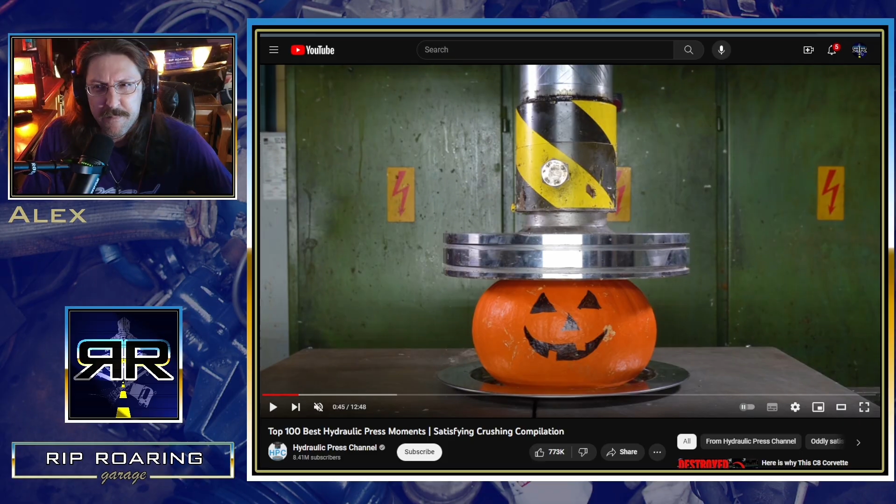Happy Halloween. This is foreshadowing for next episode. Crunch. What the?

Many of you may have heard of Giga Press or Giga Casting. In fact, that's probably why all the new guys are clicking on this video. So what I'm going to try to do is be as objective as possible, and only at the end will I impart my own opinions, right? However, getting information at this early of a stage is very difficult because, let's face it, most of the articles and videos are from Tesla fanboys. And we're going to have to dig through and cut through that and see how it's going to affect you.

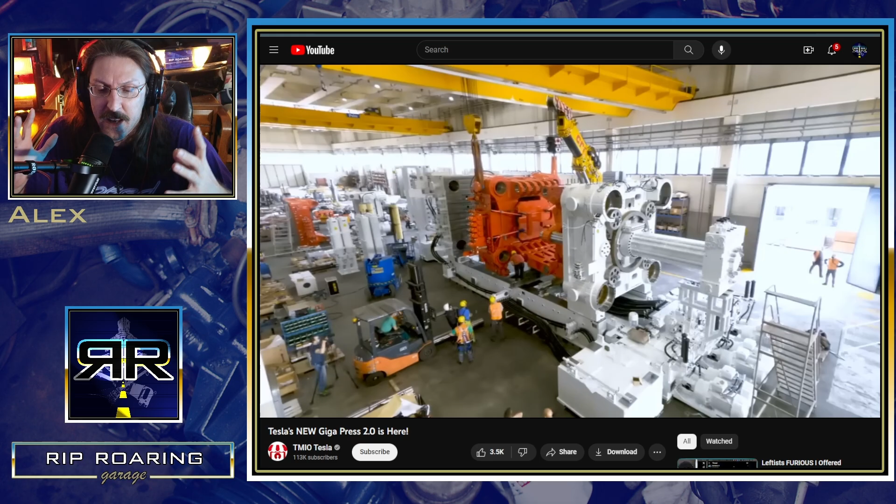Because as I said, this is a process that GM is investing in, Toyota, VW. So these are basically the three largest manufacturers in the world right now. What is Giga Casting? Well, like the name says, it's casting, metal casting at a larger scale. Not at the giga scale, let's be real. That's marketing lingo. And that is our first clue, our first indication that something's off.

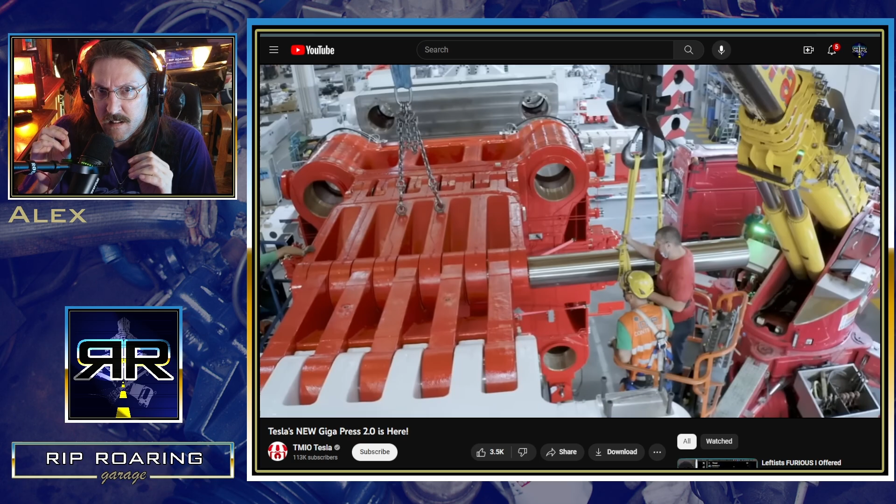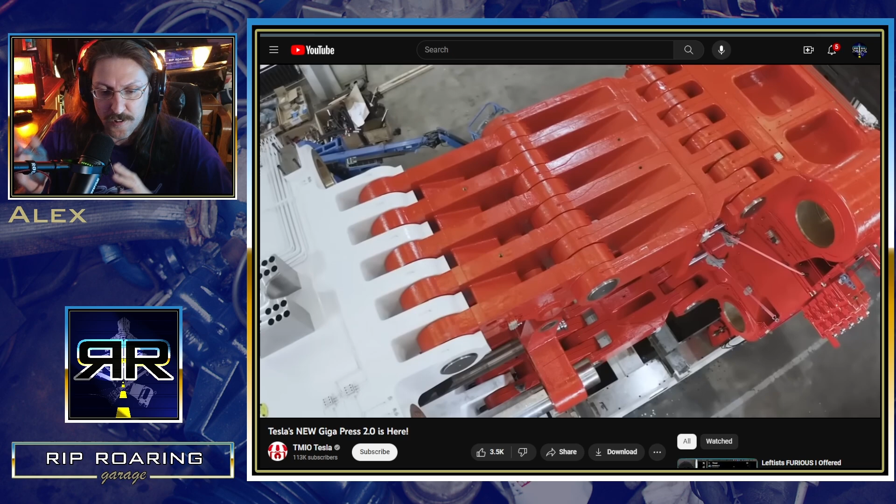There's a catch, because we have many different technological processes in fabrication, in metallurgy, and all that don't have a cool giga name. Why does this one have it? Because there's a catch. The marketeers are running out and putting this cool little label on it just to get that positive initial review, like a channel like this.

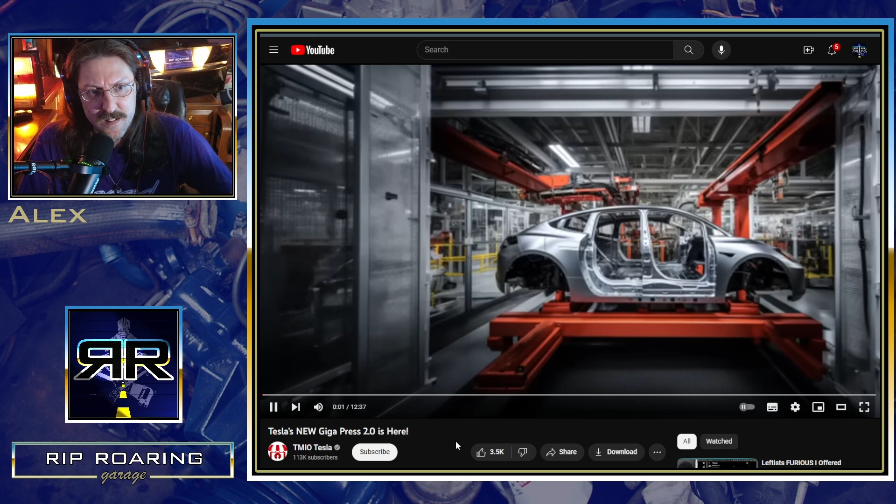Tesla is in the midst of developing a new $25,000 electric car, which aims to be half the cost of the previous generation vehicles, including the Model 3 and Model Y. Obviously, every manufacturer wants to lower costs and make their vehicles more affordable. Elon Musk revealed his plans to produce tens of millions of these cars.

Okay, tens of millions of cars. We're getting into the fluffery now.

Earlier this year, starting with a revolutionary new method that highly parallelizes the manufacturing process. Tesla calls this the Unboxed Process, which involves developing large sub-assemblies, giving them the advantage of allowing multiple workers and robots to focus on these relatively smaller parts at the same time.

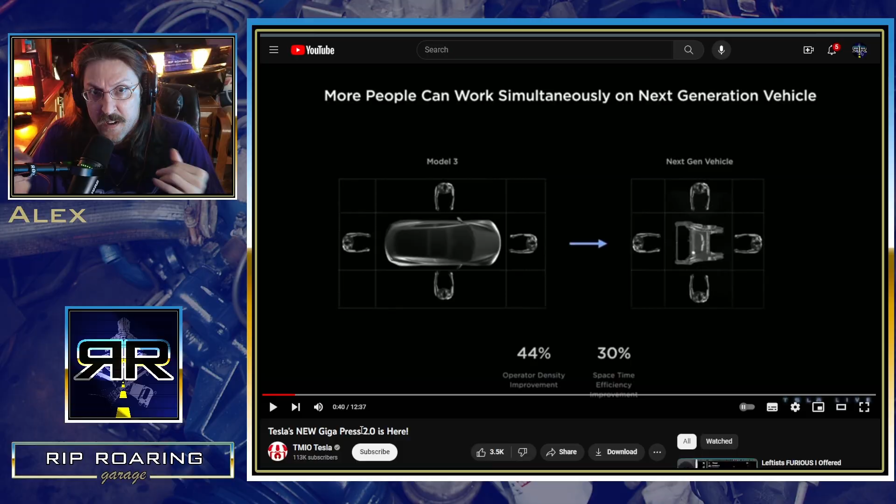So the problem with this is actually going a step back. When you're young, and most Tesla owners and fanboys are younger, they may not know this. The way vehicles were built was the vehicle was in place, people and teams would come around it and do their thing and assemble it little by little. They still do this on larger vehicles, trucks, tractor trailers, and buses. You still do that with ships, where they lay the keel.

This marks an innovative departure from the traditional assembly line.

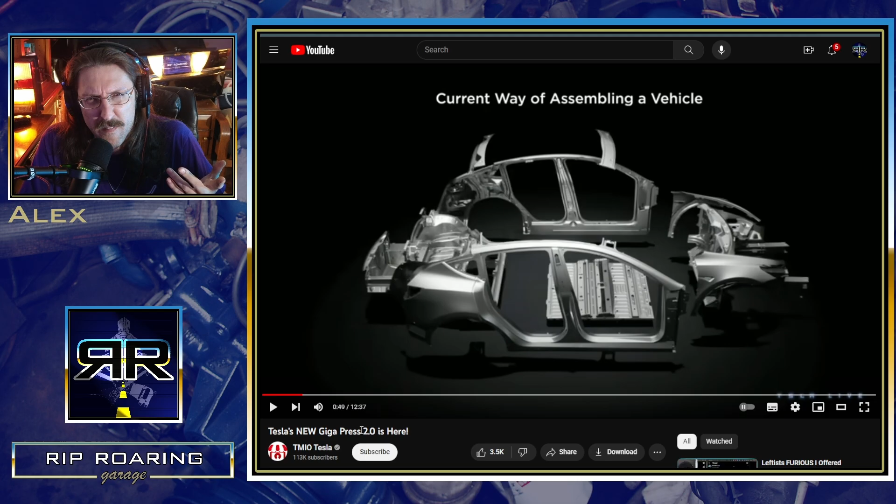How is that innovative? It's going back. It's literally showing me exactly how cars have been made for 70 freaking years.

Which, by definition, follows a linear path and hasn't seen significant changes in literally over 100 years.

Really? Or how about automation, robots? That drastically changed how cars were made. And this is the problem, like I said. You will get a channel like this that is enamored with the company. They're acting like a cheerleader, like unpaid advertisers.

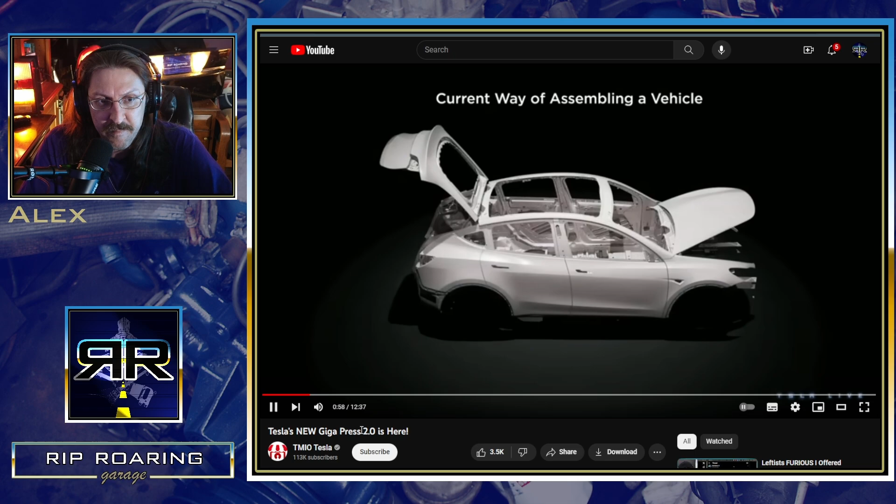Since it was popularized by Henry Ford. However, a recent report from Reuters reveals Tesla's under-the-radar pursuit of a groundbreaking next-gen technology, a Gigacasting 2.0, which is something slightly different from what they initially showcased to the public back in March of this year.

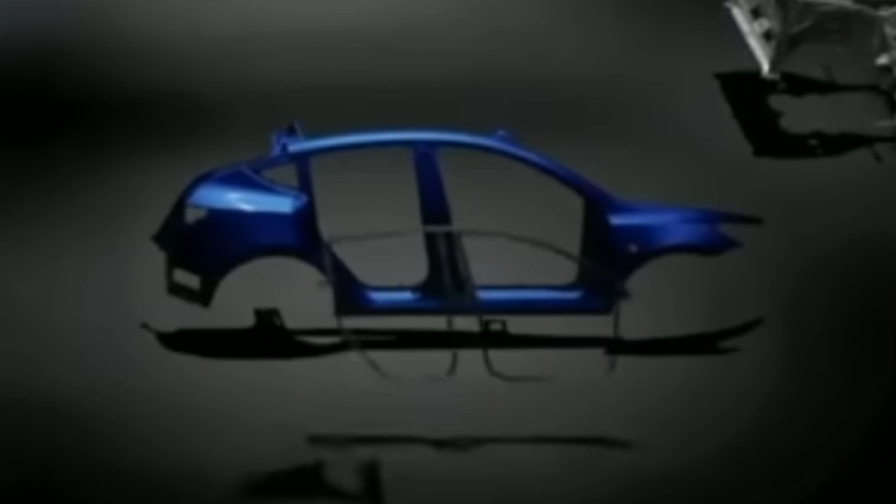I don't know what's so spectacular, because it's showing exactly the same components you get on a modern car today. Side panels and subframe. And you got the rear tub and the front trunk. No, I'm never going to say that stupid freaking word.

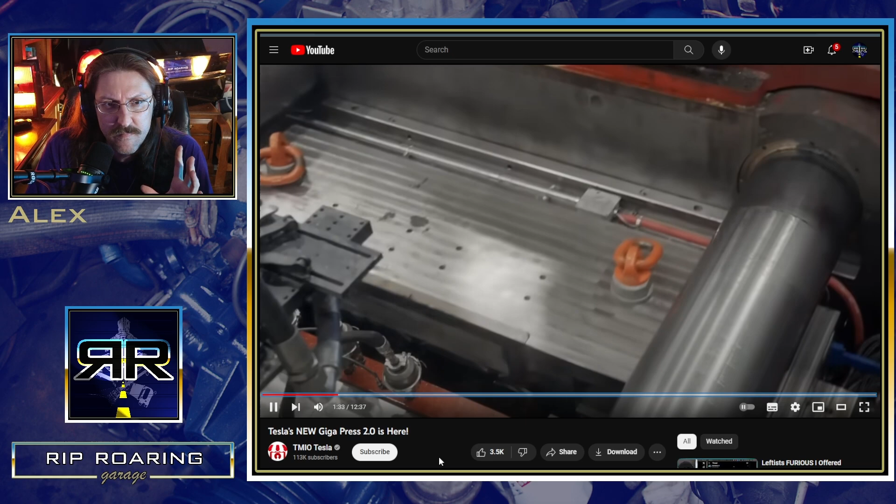Tesla has been making use of large gigacastings for the front and rear underbody of its Model 3 and Y vehicles for some time.

So in other words, that's the 1.0 version. Actually, I didn't know that's the way they made them. And that worries me. It should worry anybody that has a Tesla. We're also dealing with the metal that Teslas are made from.

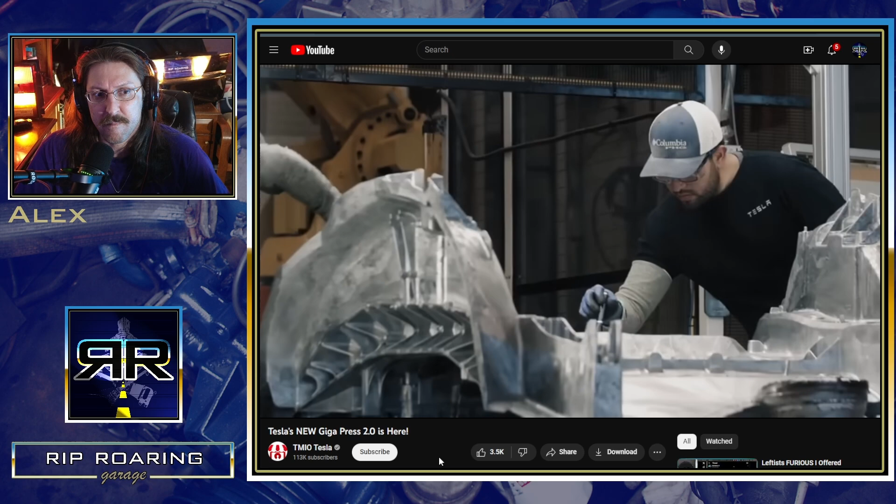They use custom-designed Giga Presses ranging from 6,000 to 9,000 tons of force that are built by the company Idra and contain some extra requirements from Tesla.

Guy doesn't say what those requirements are. However, Idra, this manufacturing company, it's a metallurgical company. They make these kinds of things for multiple manufacturers and not just in the automotive industry.

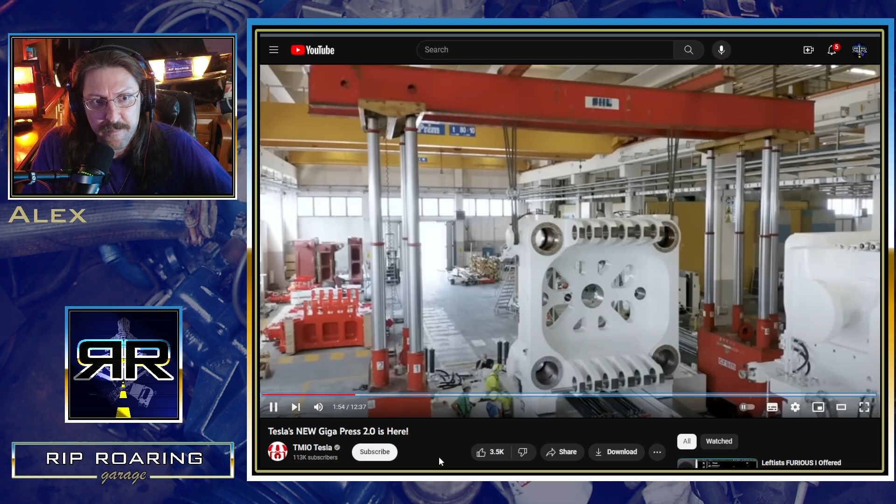Giga Press is one of the largest we know of that's been acquired by Tesla and is set to be aimed at casting parts for the Cybertruck. Because this is a completely different type of vehicle that employs an exoskeleton design. How is that completely different? That's just unibody. Unibody, you can say, is an exoskeleton car versus a framed vehicle that has, like a keel, like us, an internal structure.

Which places the structural elements on the exterior of the vehicle, as opposed to the internal chassis of a car. So he even says it as a fanboy channel. These are the guys that are out there getting out in front of any question somebody might have. Cheerleader, innovation tech, and buzzword after buzzword after buzzword. For this novel pickup truck. This, in turn, has provided Tesla with valuable insights that they could potentially reapply back into their existing chassis-based vehicles like the Model 3 and Model Y.

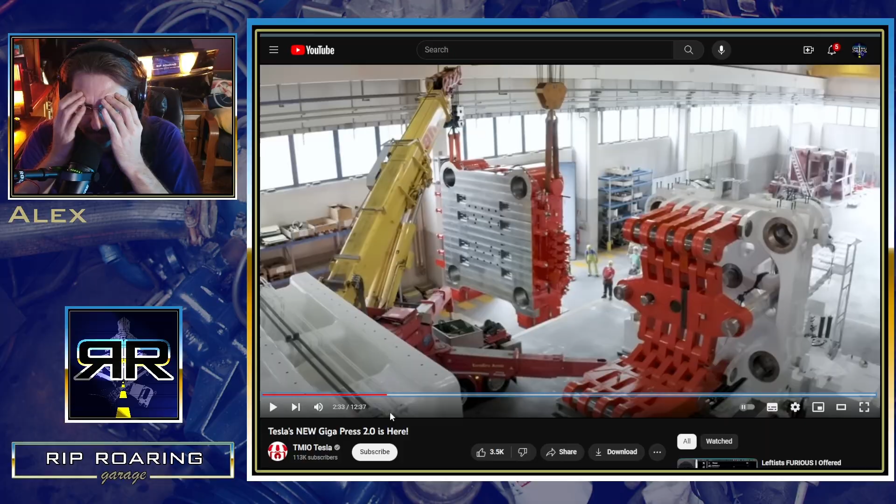What? Those are not chassis-based vehicles. Words have an importance. They communicate things. Teslas are unibody. They're not chassis-based vehicles. Tesla's approach is instead to leverage the learnings from the Cybertruck and create an entirely new, more efficient platform for the development of the upcoming $25,000 vehicle using the Unboxed process inspired by the innovations introduced with the Cybertruck.

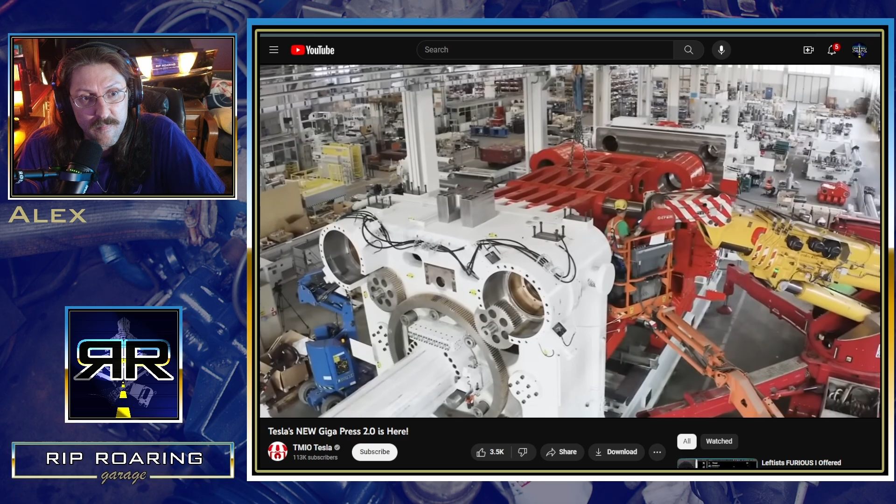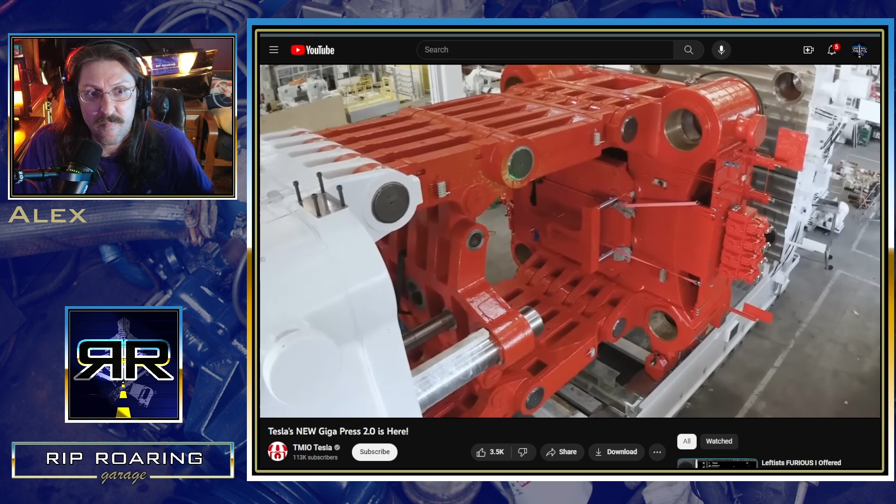Tesla's plan is to use this ultra-large casting machine to form the entire underbody of their smaller $25,000 vehicle in one single piece. This appears to be possible in part because the Cybertruck castings are so large. This is a whole bunch of fluff and nonsense. Tesla does have a patent for a giant multi-directional casting machine. Now this is actually interesting. Multi-directional casting, that is new.

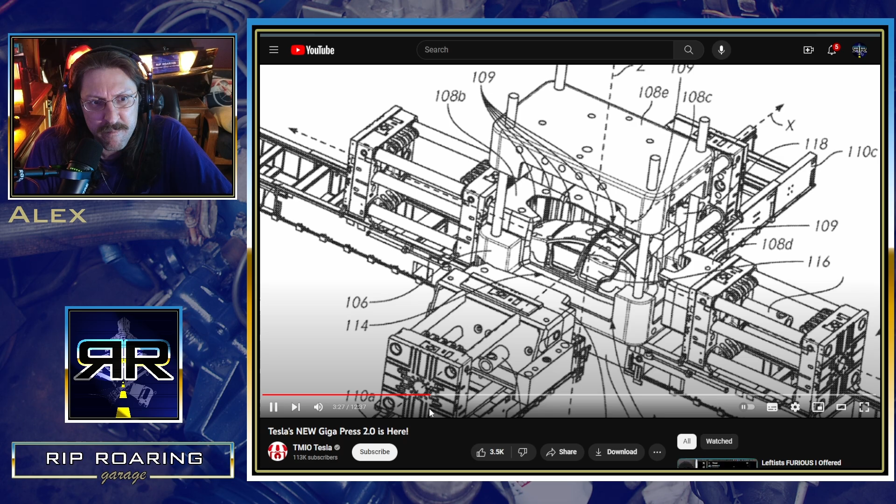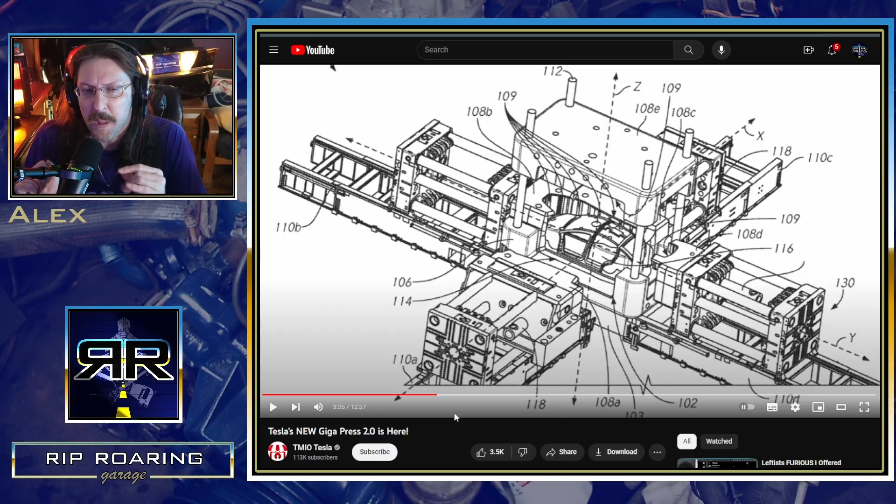Said to do the entire vehicle at once, demonstrating their desire to put more and more parts into a single casting. Why? What's this obsession with fewer parts? It has fewer moving parts. We want to make the body with as few parts as possible. Something that has many different parts makes it very easy to fix. It also makes aligning things easier. If you have one defect, then that defect will propagate to the entire assembly if it's one chunk. But I'm going to get into that in a little bit. I will be looking over some other articles that are more objective than this guy.

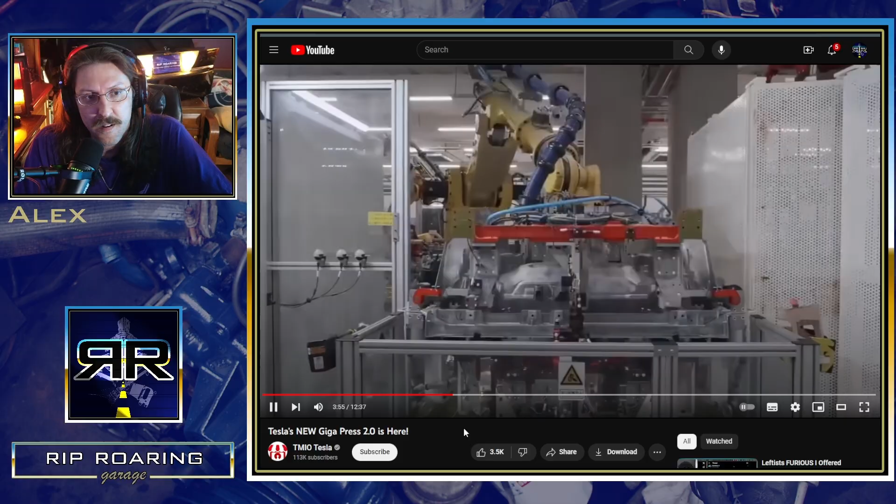According to Reuters, this would allow the next generation vehicle to combine up to 400 parts into a single casting. Again, this obsession with fewer and fewer parts. You need multiple parts. What are you going to do at one point? Just make a car with one part? That I don't know. These people are weird. I don't get them. It's interesting to consider that Reuters has been quite accurate with its predictions thus far. Right. Okay. Now this could be massive for Tesla and would push them to further disrupt the traditional automakers, especially since their current gigacastings have automakers who haven't at all innovated in decades scrambling to catch up.

This is, again, we're getting into religious territory, automakers that haven't innovated. That's why we have 1,000 horsepower cars you can just buy with the warranty. That's innovation, if you want to think about it in that sense. Tesla's tremendous cost savings and additional speed due to the... That's the key. That is the key right there, the cost savings. Giga Press's single part efficiency, eliminating swaths of factory robots, has made their electric vehicles highly competitive in the market. They're so competitive that you only see them in California and New York, right? While everyone else struggles just to break even. Just pulling it out of their butts.

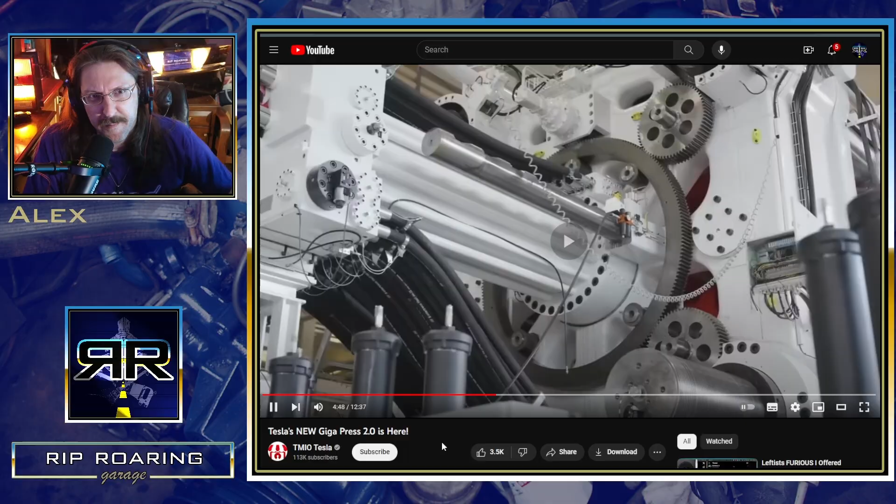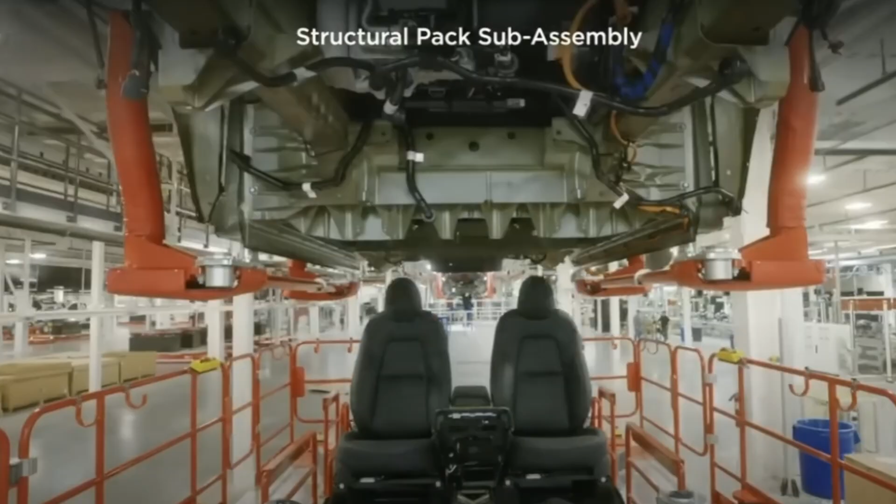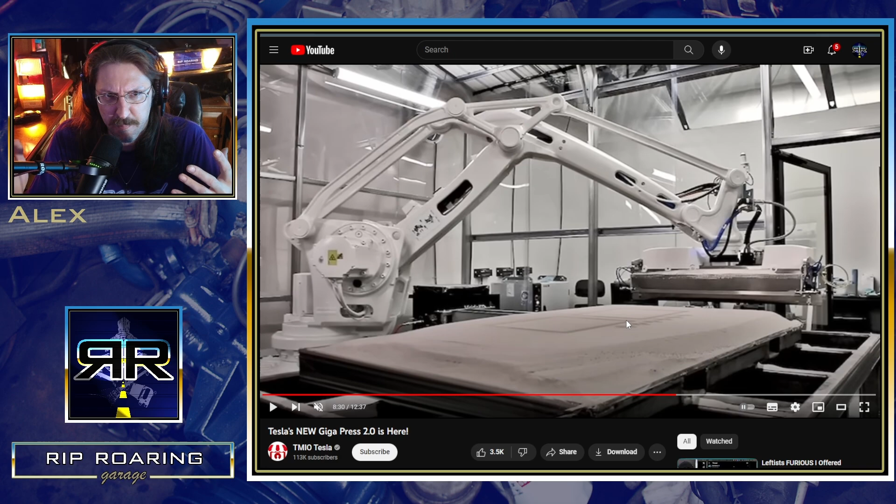However, this new Gigacasting 2.0 deviates or even conflicts with the innovative Unboxed process, which would completely change how the vehicle is built. That's an assembly line, buddy. Now, this is the interesting part. They have a cast manufacturing method that uses 3D printing with the medium being sand. You have something like this that basically will print out whatever the mold is supposed to be, and then you can use it in those presses. One of the cool things about the sand 3D printing mold is that you can create objects like this that are very intricate and complex.

Now, looking at a couple of other sources, Automotive News Europe: Giga Presses, the giant diecasts that are reshaping car manufacturing. As in the previous video we saw, the impetus is to reduce costs and increase efficiency, not the vehicle's efficiency. And that's the word game they play. They will say, oh, it's more efficient. No, it's not. It's the same car. You're just making it differently. It's more efficient for them. It costs them less. Granted, that may be a way to get a car cheaper. However, with inflation and all that, I don't see them hitting that 30K mark.

Tesla has pioneered the use of massive casting machines, also known as Giga Presses, to make large single pieces of the vehicle. Now, here we go. Critics say the process poses quality and flexibility risks, as a single flaw can compromise a whole module and make fixing more difficult.

But with the auto industry struggling to preserve profit margins and amid surging raw material prices, automakers including Toyota, General Motors, Hyundai, Volvo, and Chinese electric vehicle startup NIO are turning to companies such as Idra for help. We saw this innovation once before, probably many times, but one big time.

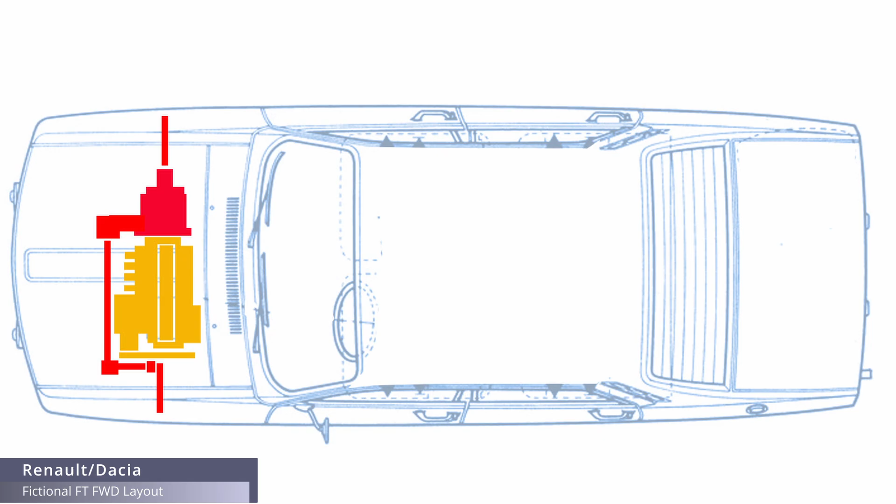And that was when we went from the conventional layout frame, engine in the front, drive wheels on the rear. The change occurred when they bundled everything into the drivetrain. The drivetrain assembly was the engine, transmission, and everything associated to get power to the wheels, all encompassed in the front, because it was easier to make that as one larger assembly and just drop it into this frame, the monocoque frame they called, right?

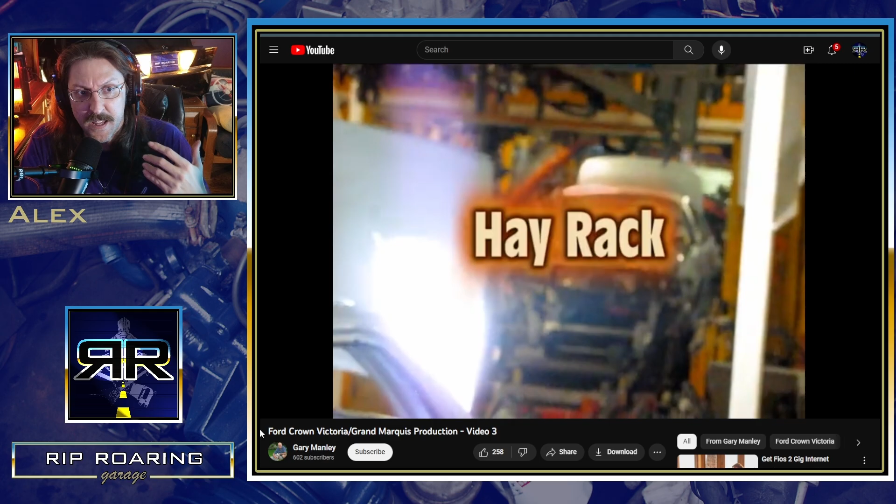The unibody. When you look at a car like the Crown Vic, you have the frame and the body coming in separately. So when they drop the body, the engine's already there, but it has to be done separately. On a unibody car, they will just add the entire drivetrain in one shot. Now, this doesn't occur with our Dodges because they're rear-wheel drive and they come up from underneath. And many cars will have their different processes.

However, the big question still remains. What happens with defects? Because on a car like this, everything is done compartmentalized. So a defect will not propagate to the whole car. And worse, that defect could translate to a car that ends up on the dealership lot and nobody knows until much later. Inside EVs, so these guys have that ideological interest to push this as the greatest thing. A Giga Press is a high-pressure die casting machine that injects molten aluminum into casting molds.

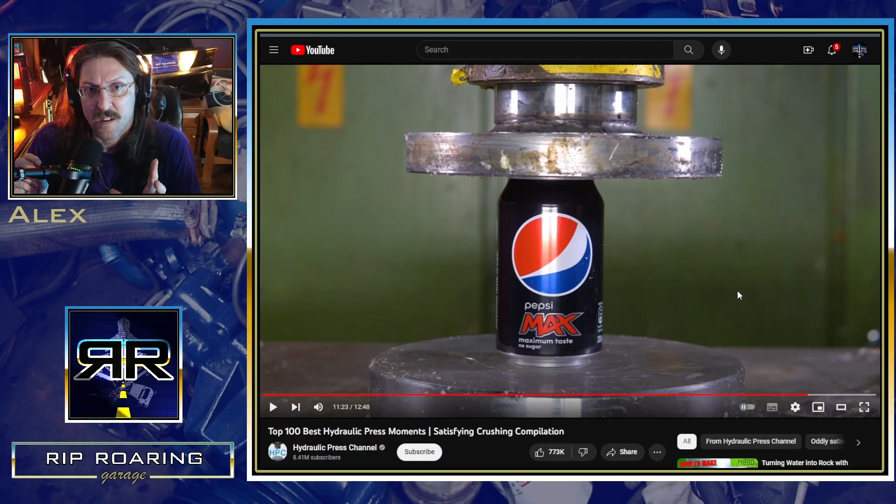And that's another problem we have. So on top of the defects that could occur, you have aluminum versus steel. Most cars are made out of steel, their body panels, their structural components and whatnot. Aluminum has a couple of interesting properties. One of them is that it work hardens, but also the reason they use it is because it has a lower melting point. You can inject aluminum into a cast without bringing the temperature up to the melting point of, let's say, steel.

I want you to look at the way the liquid inside an unopened can, how it creates these ribs. The metal will find its most energetically happy place. Incidentally, why barrels and other pressure chambers may have ribs on the outside. Well, they say 9,000 tons of force. What is that in pressure? 55 to 61 thousand kilonewtons, 5,600, 9,200 tons of force.

But force on its own is meaningless. I need a surface area. What does this force apply to? If you think about it from how it's made, an engineering standpoint, you don't need that much pressure when you're casting it. You only need as much pressure to eliminate any air bubbles and pockets in the cast.

Light Metal Age. The impact of gigacasting on car manufacturing and aluminum content. And they actually get into the alloys used, so the A380 and 319 alloys. They're talking about casting being historically used for the engine blocks and other larger assemblies that are made out of iron. Steel, but we colloquially call it cast iron.

Now, aluminum has been usually done in extrusion. You get it warm enough and you run it through something that shapes it, and it comes out as a sheet or a profile, like literally one of the ads. Yeah, like something like that. Remember all the little toys, die-cast metal. It wasn't plastic. It had some heft to it. It was a nice product.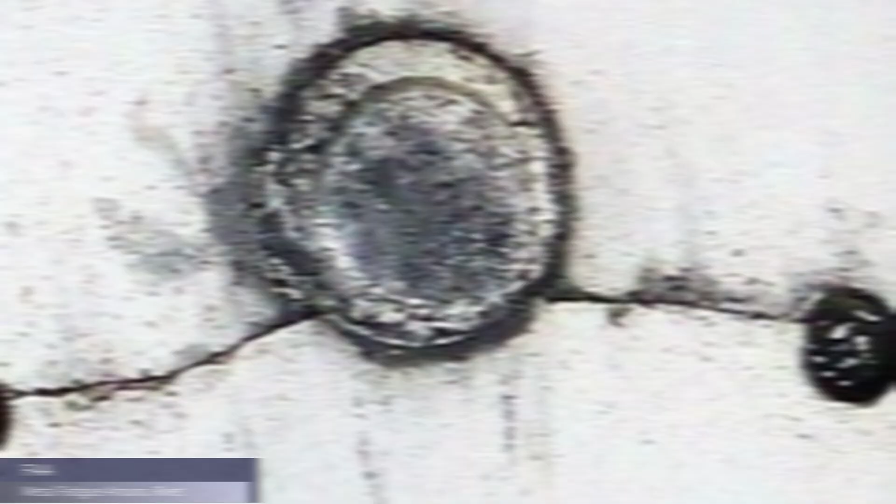The problem with these is that they're not exposed to the same impact forces that a car is. There's concern of work hardening. So if you hit something, they start getting harder. When a metal gets harder, it gets more brittle. Aluminum tends to crack. You'll see this in aviation, little rivet hole. It'll develop stress risers, cracks, and these things have led to many people dying.

Now, the problem with cars is that they will also develop this. How do you fix it? You have to weld. There's no replacing a panel. You can't just cut out a chunk and then weld it in, because now you're messing with metallurgical properties. And every time you weld, you're introducing weird forces. It might look straight, but cut one end and all of a sudden it just flops up because it's under tension from that heat that you're putting localized into it.

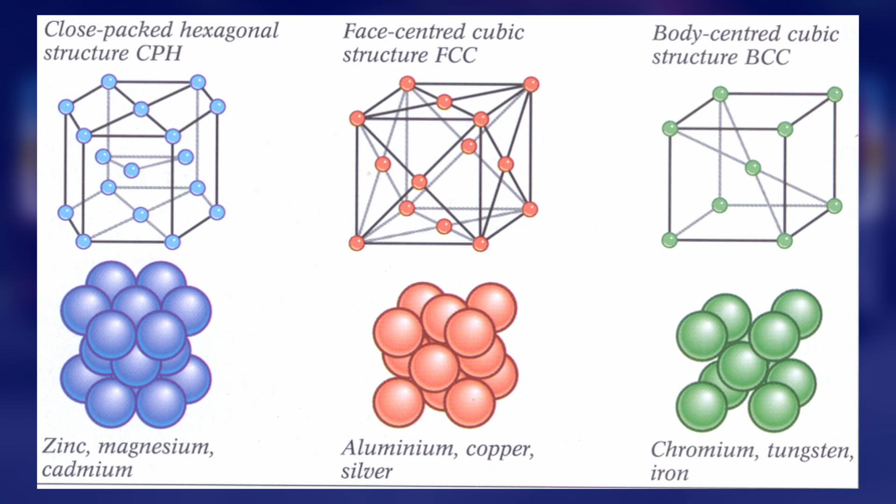So repairing these cars, which is one of the concerns that only these guys seem to bring. Even in the benefits, they talk about, by comparison, sheet stampings can be made with thickness as low as 0.7 millimeters and can have higher strength than the casting. Yes, metal has a crystalline structure. Sometimes you see it as a square with the big carbon steel and all that stuck inside those squares, whatever.

But bigger than that, there's granules. And these little chunks like to align in certain ways. And that's the reason why we have forging. Forging aligns these things in a nice, even pattern. The same happens with forged pistons. Everybody wants forged pistons. We have forged cylinder sleeves. And anything that requires a great deal of stress is going to be forged.

Casting, gravity is the only force, maybe some pressure, that aligns those granules. And the worst of all is machining. Machining will get you a nice, pretty part, but again, it's cast, and then you're taking things in an unnatural way.

They can't name a single benefit to you, the consumer. It's all about supply chain logistics, crash performance, possible. They're trying to come up with something, because otherwise they got nothing for the consumer. What does the consumer get out of this? Reduced costs for the manufacturer and supply chain benefits. Whoop-de-freaking-do. Well, the big downside is repairability. And that's the big thing. The fact that you cannot repair these.

It's already aluminum. We already talked about the Rivian, how you have the Unipanel. A dent right in the quarter will total out the vehicle. Now imagine if this part, right, is the whole car. We're not even talking about a $42,000 repair. We're talking about more than the vehicle, more than a brand new vehicle.

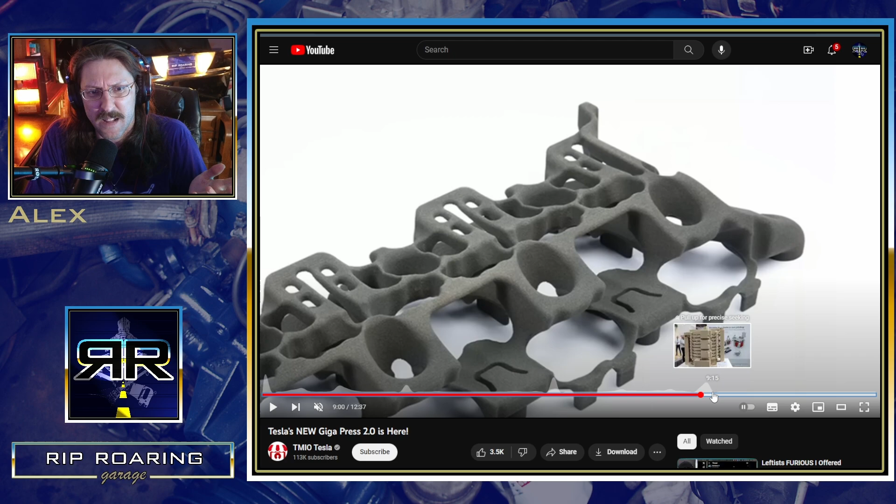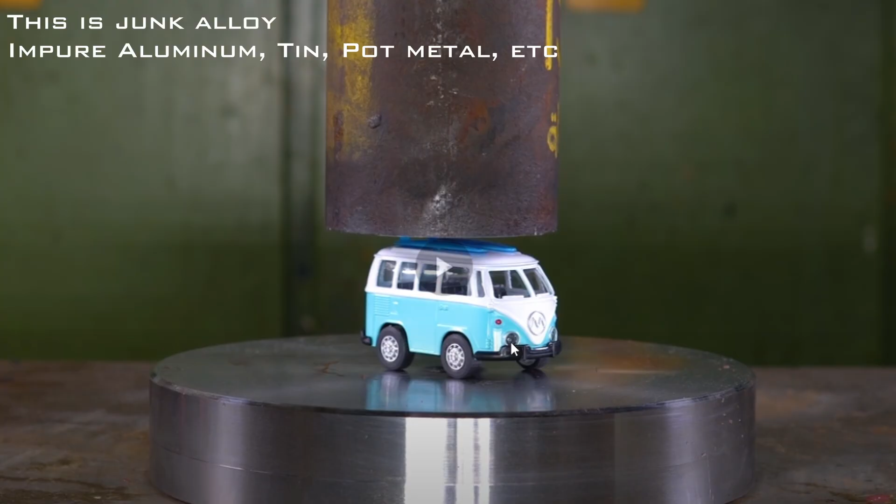Normally, I don't care what Rivian does, or Tesla or whatever. Like I like what Elon Musk is doing with Twitter, but that doesn't mean squat with the cars. In fact, what I want to show other than this is some of the pot metal castings. These are die-cast metal cars. You see how it cracks and rips? Steel won't do that. Steel will bend and stretch rather than rip, tear, crack.

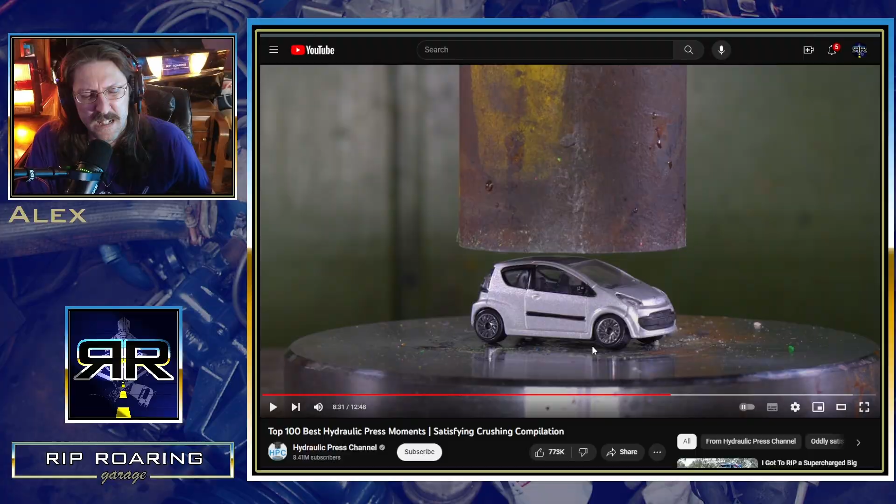Here's another one. Looks a little more expensive. But again, you see where that crease was that was in the mold. That leads to the stress riser, and it's going to crack there. Anytime you have a change in direction or change in shape, you will get a crack forming there with aluminum.

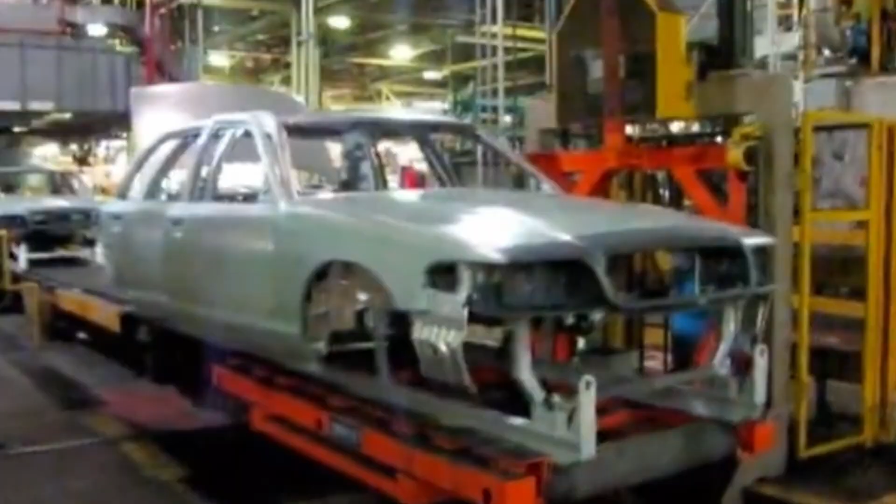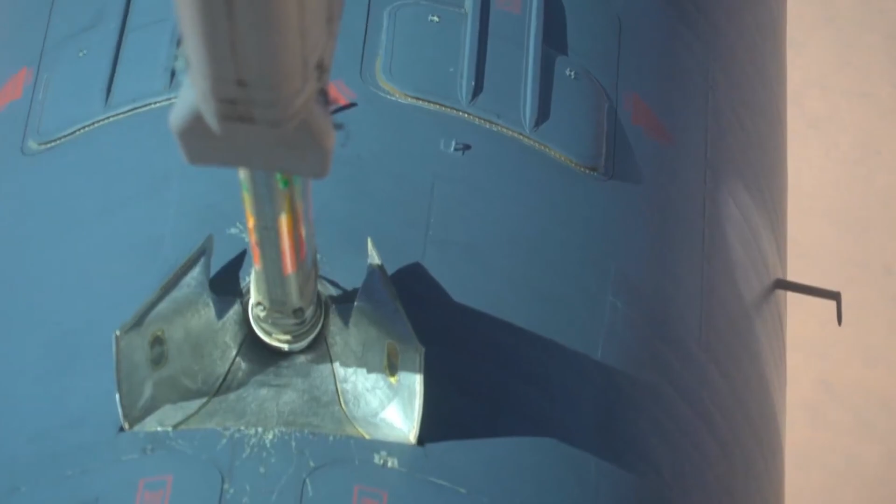That B-52 that's going to be 100 years old when it retires, it's not really the same plane. They've reskinned it. The spars, the ribs, everything gets replaced after a certain amount of cycles. All that creates this flexing. Those of you that are old enough might remember the Aloha Airlines incident. Stress fractures along the rivets caused the whole plane to just peel open, look at that. Cracks that go unnoticed. Now apply that to a freaking car.

These things are going to become death traps before anybody realizes it, and they want you to think this is an innovation, a great leap in technology. You want to talk innovation? Aluminum structures and aluminum skin on aircraft? We went to carbon fiber. That's tough material, but that costs money.

While some people are interested in that, some people want the quality, the vast majority of people are just little sheep, and rather than buying the used car, no, they got to show off to their neighbors. Look at me with the new car with the most outlandish freaking giant grill and stupid headlights, because that's what catches your eye. I know I'm missing a lot of things. This is a massive topic. Hell, we might even have a couple of engineers to debate this further, because this is significant and it's looking like a lot of companies are going in this direction.

I am not going to be into these kinds of cars. They're made to be single use, non-repairable. They will try to engineer them where the car will last only as long as your loan lasts. So if you have a 7-year loan, that car is going to last 7 years. And after that, it's just unfixable. It's such a cash grab. The amount of waste and junked cars we're going to see is going to be insane. It's training us to accept that we don't get things that are fixable.